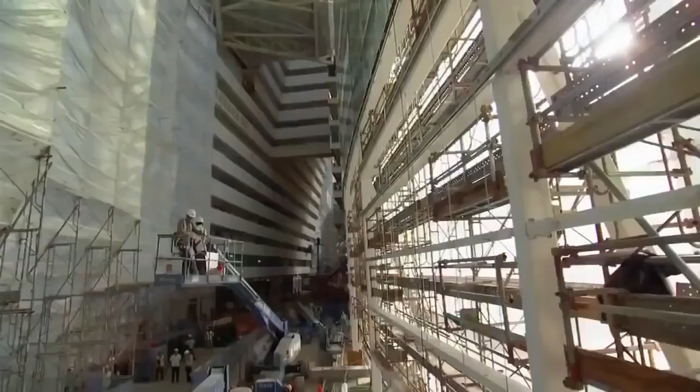Singapore is reinventing itself. This small island nation is attempting to finish one of the most audacious buildings on the planet. It's the country's first casino, 3 skyscrapers, covering 9 million square feet, and topped off by an engineering masterpiece, the first ever SkyPark.

Longer than 3 football fields, with gardens, swimming pools, and restaurants, all higher than the Seattle Space Needle. We're actually in the pool right now. This is the view from the pool. Wow, it's pretty spectacular. That is amazing.

To finish it, crews must perform some of the highest and heaviest lifts ever attempted. You're putting a piece of steelwork the size of an aircraft carrier on top of 3 towers. They'll tackle one of the largest paint jobs on the planet. You would never do this in America. And erect one of the longest cantilevers in the world. 200 feet out over nothing. Oh my God, that's enormous.

I am in Singapore, a tiny island nation with less than 5 million residents. In fact, the entire country is smaller than all of New York City. Located at the southern tip of the Malay Peninsula in Southeast Asia, the main island of Singapore is both a city and a country, one of the most densely populated in the world.

Culturally speaking, it's a somewhat strict and buttoned-up environment. Chewing gum is against the law. Insensitive behavior is punishable by fine. And if you're caught vandalizing a building, you quite literally get hit with a stick.

But despite this conservative cultural backdrop, Singapore is attempting to reinvent its image by doing something totally surprising. They're going to open a massive casino.

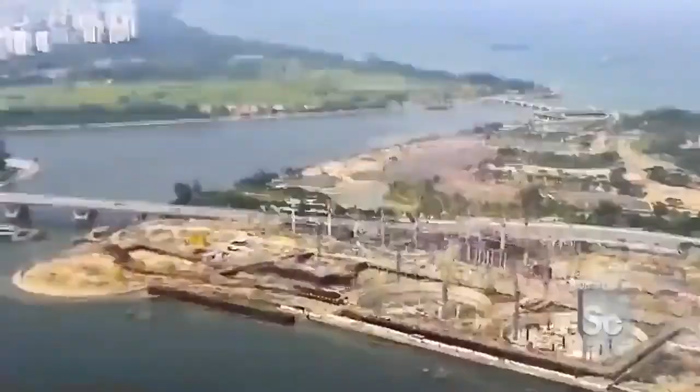With no natural resources of its own, Singapore is risking $5.5 billion in hopes of cashing in on the gambling boom exploding across Asia.

It's a pretty significant gamble because for Singapore, you've never had gaming before at this scale. You've never had a resort at this scale. You're taking a major leap. Yes, it's certainly a transformational project for Singapore, where you hope to not just double, but triple the tourism receipts. That's big.

The centerpiece of this giant transformation: the Marina Bay Sands, one of the biggest and most expensive casino complexes in the world, unlike any hotel and casino ever built.

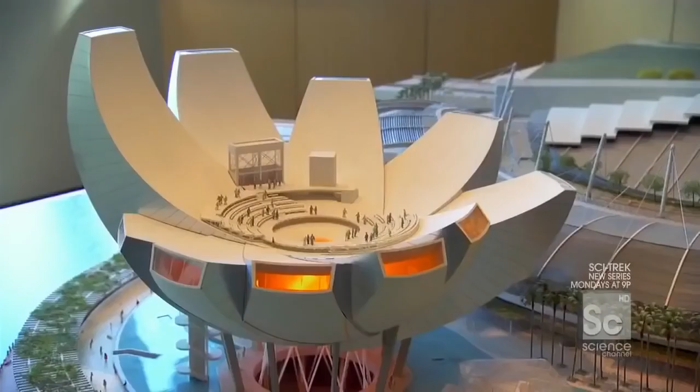Rather than just being a traditional hotel and casino that we might find in Vegas, instead we have a museum, theaters, retail, a casino, a massive convention center, 3 incredible hotels, and all of that capped by the first ever SkyPark. The SkyPark on the very top will become the icon of Singapore, we think.

In a move that has never been done before, world-famous architect Moshe Safdie put a park across the top of 3 massive skyscrapers. An 1,100-foot-long urban oasis with tropical gardens and one of the longest swimming pools on Earth, all of it perched 55 stories above the ground.

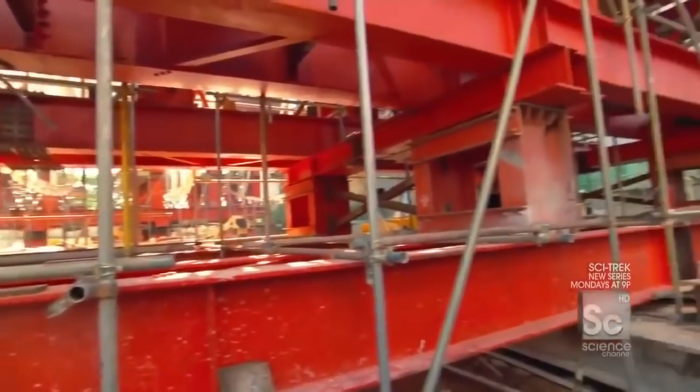So, Brendan, how do you describe a SkyPark to people? It's just a fantastic structure. I've never seen anything like it. There's 3 55-story towers, and you're putting a piece of steelwork the size of an aircraft carrier on top of it. So it's quite a feat.

And there's a park up there. There is. Well, there's more than that. There's observation decks and swimming pools and restaurants and all sorts of things. So it'll be a little city in itself.

The biggest challenge for builders: lifting 7,000 tons of steel, which is more than the main span of the Brooklyn Bridge, on top of 3 650-foot-tall buildings.

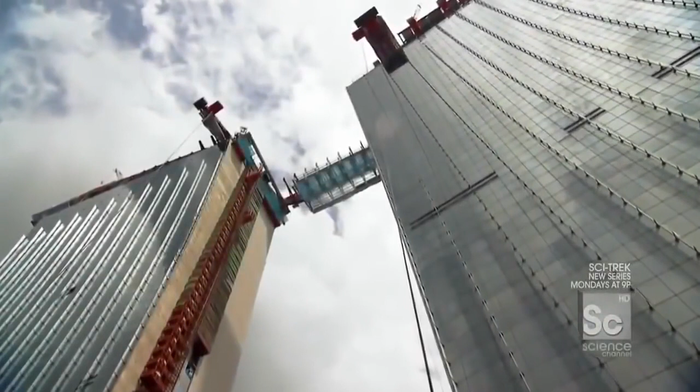To get it up there, the team divided the structure into 14 large but more manageable segments. 6 form the bridges connecting the towers, and the other 8 make up the observation deck, which sticks out 218 feet from the end. Right now, crews are about to lift the second-to-last bridge segment, a massive 350-ton piece that will hang between towers 2 and 3.

It's a little after 7 p.m., and on most job sites, it'd be quitting time, right? Folks would be going home. But here in Singapore, we're about to begin one of the most critical lifts in the entire project.

That bridge segment right there, an over 350-ton chunk of steel, is about to get lifted up over 650 feet in the air.

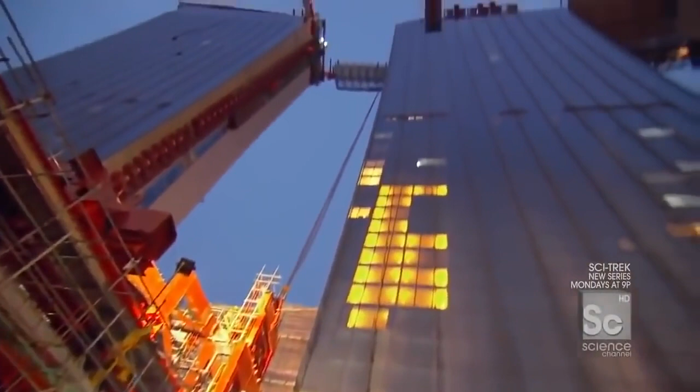I mean, you know, in principle, this sounds crazy, right? Yes, we're actually taking a bridge, lifting it up, and putting it on top of 2 skyscrapers. This has never been done. So you got to be a little bit nervous to get this thing up. Oh, definitely. We have to get it right.

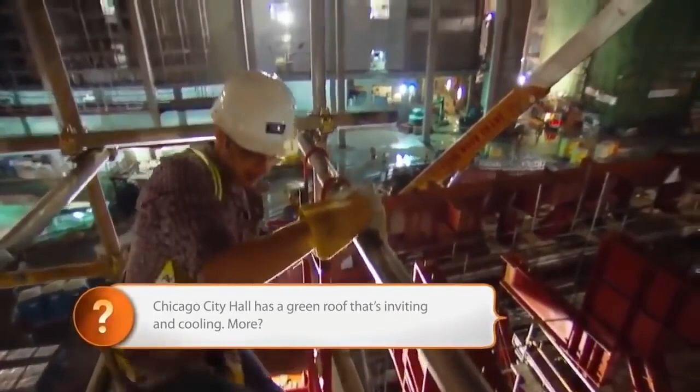Lifting this piece will take some of the strongest hoisting cables ever designed. They get attached to the very top of the segment, 5 stories up. Now, at long last, I'm on top of the whole bridge segment, and you really get a sense of its length, because it spans all the way out between 2 full towers, over 150 feet long.

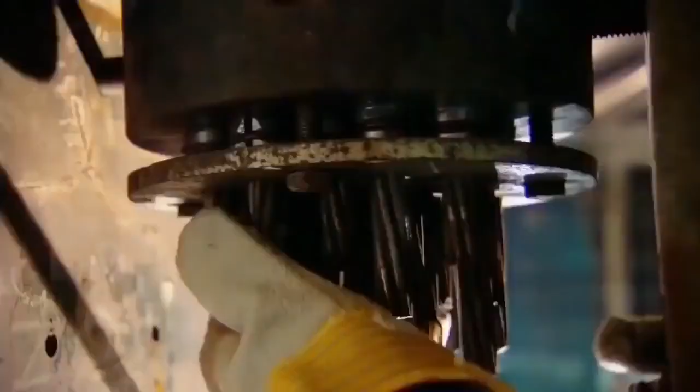And here, this is what it's all about. This is the shackle coming down, over 600 feet up. And to really get that point, look at the amount of bound cables inside of this thing. Just the density. There's 2 of these shackles, one on this side, one on that side. We're gonna lift up over 350 tons of steel.

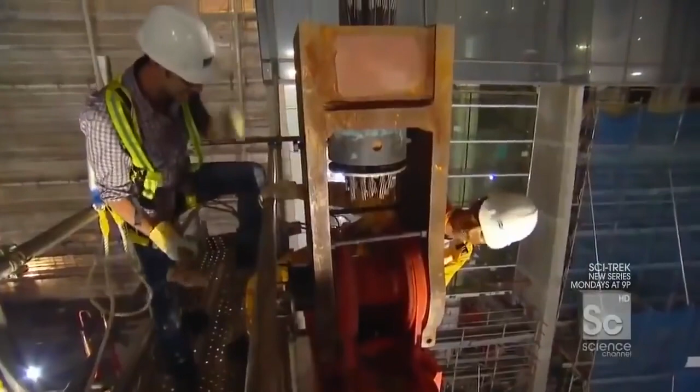All right, you call the man upstairs. An operator from the top of the SkyPark lowers the shackle down. There she comes, there it is, here it is. Okay, 960 millimeters. It has to line up within 1/10 of an inch for this 150-pound anchor pin to fit through. Oh no, stuck. Push, fight, come on, shake it a little bit. Hammer, give it to me. You ready? Here I come.

Once the pins are pounded into place and the shackles are connected, there is one final step to make sure that the load is secure. Overnight, crews test the connections for 12 hours by hanging this segment just 4 inches above the support. If everything looks good, it is ready to go up.

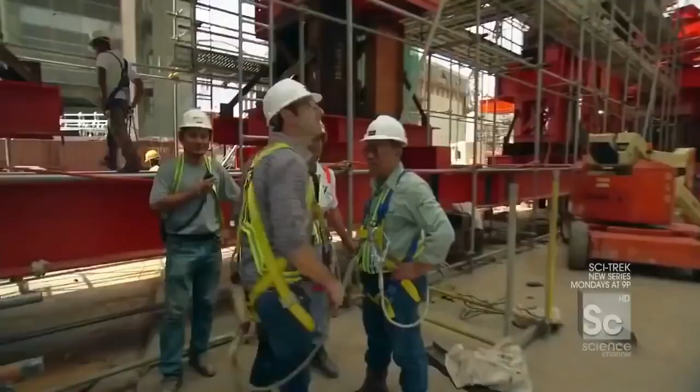Okay, Solomon, she's floating. 4 inches off the ground. Ready for the lift? Yes. How's the wind? If you can see it, it is swinging, and if it swings, it might hit the building. So when the lift begins, the concern is in a strong wind, like a pendulum, it could move and actually hit the building. It's that close to the building? It is very close to the building.

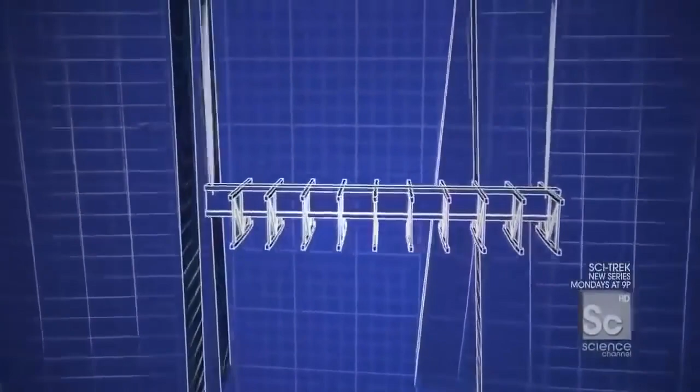Because of the curvature of the towers, this piece must pass within 10 feet of 2 glass skyscrapers on its way up. Any wind over 5 miles per hour is enough to call off the lift. So are we good? Are we ready? Yeah, good. So it's now okay to go.

Typically, crews would use tower cranes for heavy lifts, but this segment far exceeds their capacity. So instead, engineers are borrowing the technology from a different kind of construction: bridge building. Even the most powerful tower crane can lift about 20 tons. This thing weighs over 360 — not an option. So they went with something called a strand jack. To understand how it works, imagine 2 hands or clamps holding a rope. One hand locks the rope, the other brings the rope up, grabs it, goes back for more, and so on.

Strand jacks work on simple hydraulics. A bundle of 22 half-inch diameter cables passes through 2 clamps. The top clamp grips the strands and moves up almost 2 feet. Then the bottom clamp locks the cables in place while the top moves back down for the next pull-up. It takes 2 enormous strand jacks to lift this segment, one on each tower. Combined, they could lift the Statue of Liberty.

It's the first time that this technology has been used to make lifts this heavy from the top of a skyscraper. Tony? Danny. Welcome, Danny. Good to meet you. Tony, where am I standing right now?

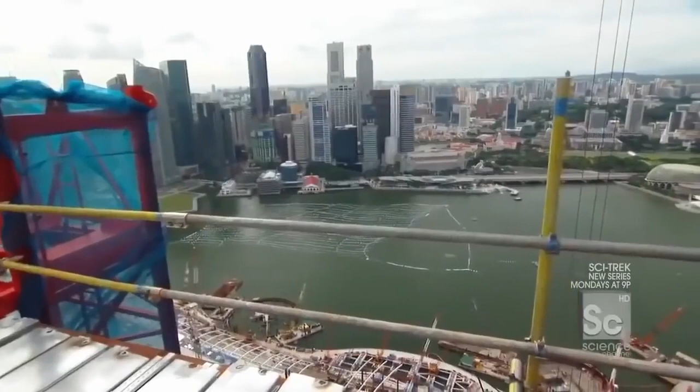Well, you're on the SkyPark. So this is kind of where the action is. This is where the pool is. Right where we are now is the second swimming pool. We're actually in the pool right now. This is the view from the pool. Oh my God, people will be able to swim out to the edge of the pool, and literally there'll be no edge, right? It'll be an infinity edge looking out over Singapore. Wow, it's pretty spectacular. That is amazing.

And what's making all of this happen is this really just nasty looking beam. That's right, so this enormous frame is supporting the strand jacking units. Now, can we actually head up top to the strand jack? Yeah, we can. Let's go this way.

The strand jack sits on a temporary support structure that extends 30 feet out from the side of the tower. So, Tony, where we're walking right now, we're actually leaving the skyscraper below us and now heading out. We've just walked off the edge of the building.

So we're now standing perched out. There's no more skyscraper below us right now. There's no building below us.

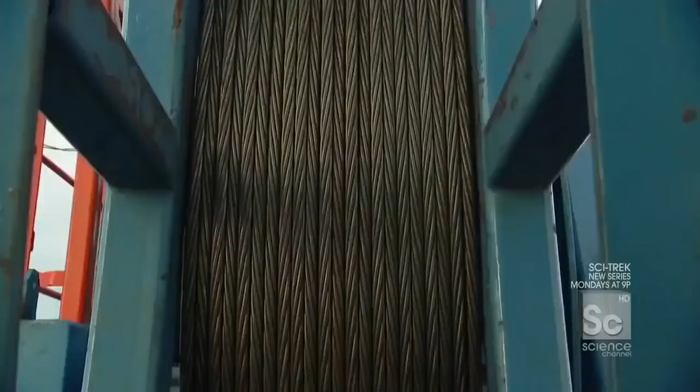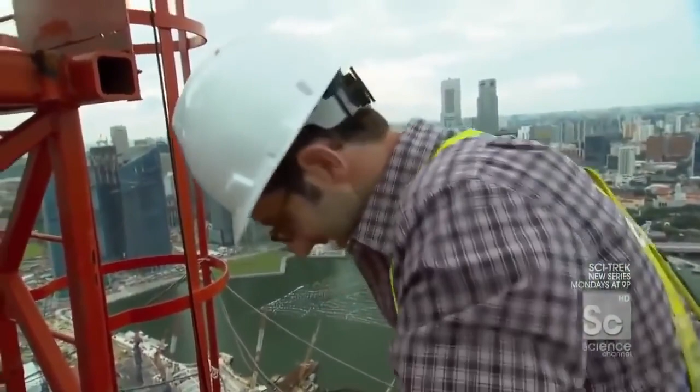It's awkward. It takes almost 30,000 feet of cables to raise the segment, enough to cross the width of Manhattan. And if any of them get tangled, workers cannot lower the piece back down. So one of the most critical jobs on the site falls to the cable manning crew here at the highest point of the SkyPark.

Okay, so I am now standing at the very top of the strand jack. And you know that because right here, this is it. This is the top of the cables. And what we're about to do, every 30 strokes, they stop everything, clamp the lift, and spray some lubricant inside to make sure everything moves real freely.

Unfortunately, I'm getting tasked with that role right now. So what do you got, some WD-40 we're doing this with? Look at this guy. Why is this the most low-tech thing in the world?

Okay, so now what we've done is we've taken the collar off, we've lowered the jack down, now we've exposed the cables to give us good access for some good greasing.

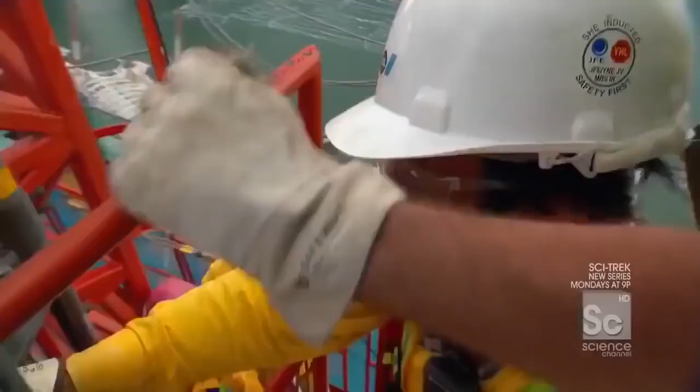Okay, Romley, how do you grease it up? Spray and pull out. Put in, spray, pull out. Go in, spray, pull out. It's sort of humbling to have to climb up to this point, to have that behind you, to have to take a spray can like this, stick in, spray, pull out.

These guys have to grease these cables once every hour for the entire night to get this segment up the final 500 feet to the very top of the SkyPark.

Coming up, a one-of-a-kind solution to fight Singapore's intense sun puts up a fight of its own.

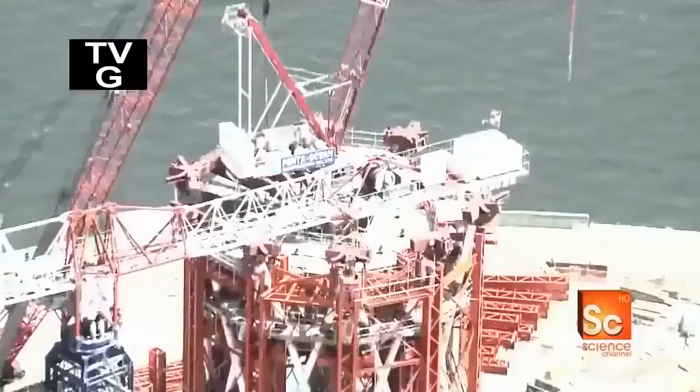Singapore is just 14 miles long. And with literally nowhere else to expand, this tiny island is increasing its footprint by actually filling in the sea, creating almost 1,000 acres of land on which to build an entirely new downtown.

So tell me something, if I was standing here 5 years ago, what would I have seen there? Well, 5 years ago, you wouldn't see the floating gallery, you wouldn't see the wheel, you wouldn't see Marina Bay Sands, neither would you see the financial center. So this is a radically different skyline in just 5 years' time. Yes. Singapore's evolution involved 30 years of land reclamation, followed by 5 years of construction, all culminating with the Marina Bay Sands. So 5 years ago, this would have been called the old downtown of Singapore. Yeah. And now with the Marina Bay Sands completed, this becomes the new downtown. Yes, absolutely.

The Marina Bay Sands' 3 hotel towers will offer guests phenomenal views of Singapore's new downtown. But they also had to be a stunning centerpiece for the city's redevelopment. So, to define their curved silhouette, the architect clad the tower facades with 1,900 glass fins, which also perform a key functional role for the building.

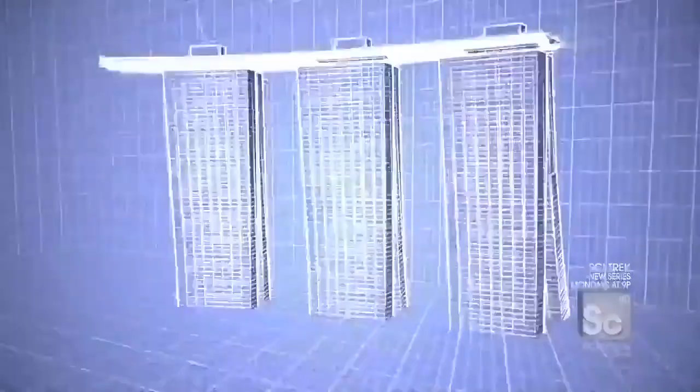The western face of the towers gets the most intense afternoon sun, so when the light hits the fins, they actually deflect the sun's rays, casting a shadow that reduces the heat on the hotel rooms by 20%, while still enabling clear views of the bay. But this distinctive design feature is also one of the most difficult to install.

I think today is going to be one of those days where I go and do something that I kind of think I shouldn't do, but in the name of really understanding how it is they build this building, we're going to do it anyway. I'm going to take you in a gondola up the side of a building, almost 600 feet, to install glass fins. And the guys who are going to help me do it are right here.

Terry? Hi, Danny, good to see you. David, how are you? Danny, good. Not bad. What are we up to, fellas? We're actually going up to the top.

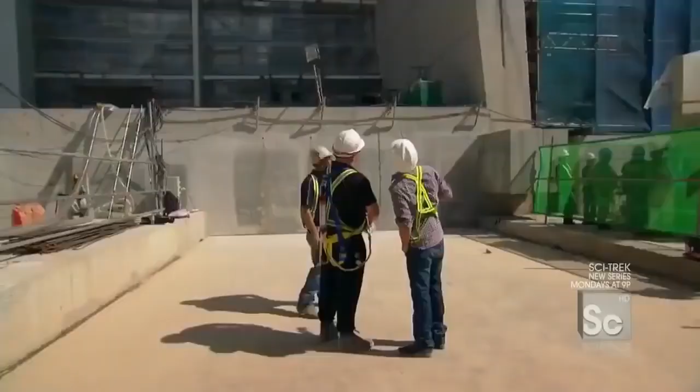Basically, we're going to install the last fins to Tower 1. And these fins are actually hanging perpendicular from the facade of the building. Each fin is 10 feet tall and weighs 400 pounds. They're hung in straight vertical lines, protruding up to 4 feet from the side of the tower. Because the facade actually curves outward 5 degrees at the top, there would not be enough clearance for the SkyPark lift to pass by. So 12 fins in the upper corners of each tower were left off until now.

So this is it, we are closing up the curtain wall of Tower 1. Yes, big milestone. Big milestone. All right, take me over to my maker. Let's do this. Okay, no problem. Lead the way.

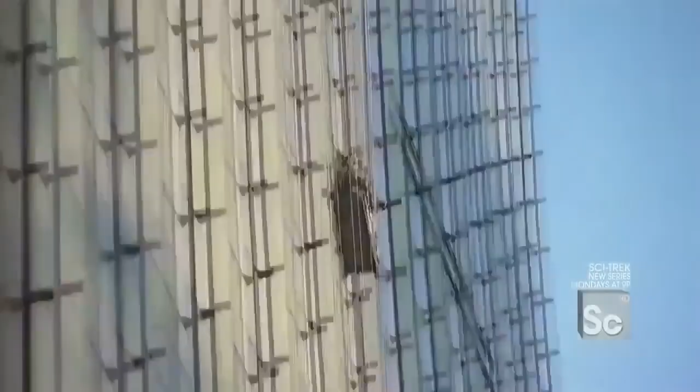Terry's crew installed the fins from a 6-foot-long gondola hanging off the side of the building. You gotta be kidding me. It's basically the size of a bathtub, swinging from 2 sets of 650-foot-long cables tied to the tower.

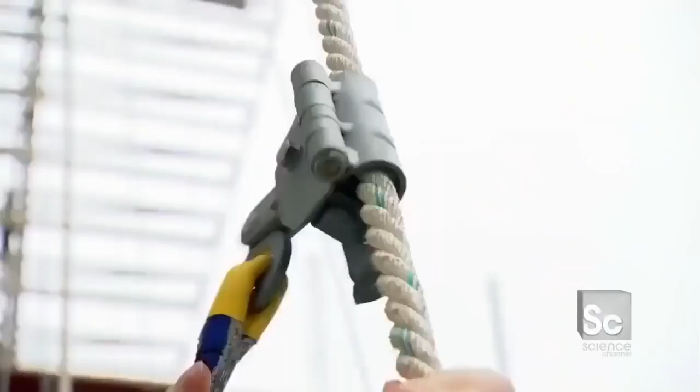Just gonna hang some glass for my boy Jay. 600 feet in the air. Right, man? Give me some skin. Buddy, we're gonna be great.

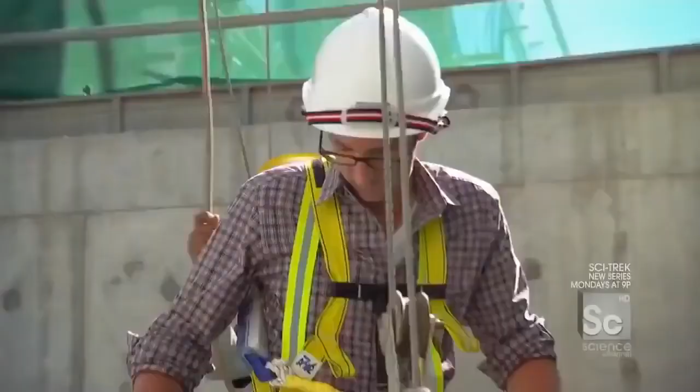Yeah, here we go. The gondola travels at just 0.2 miles per hour. Here I come, moving along, just moving along. So it'll take me more than half an hour to reach the top. Oh my God, this gondola looks like it was built by the Unabomber.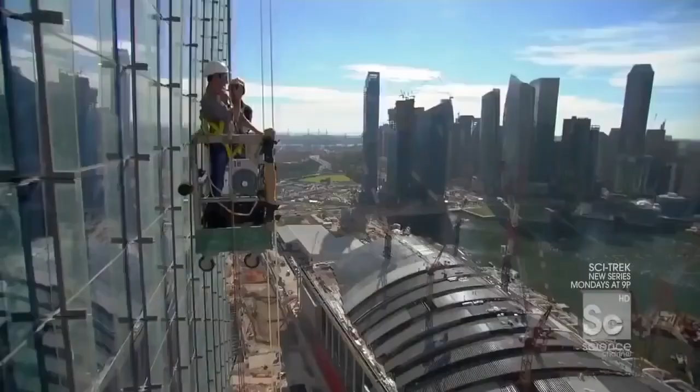Sometimes I don't really feel like I give you exactly what's going on for me right now, so I want to give you just a little taste of what I'm seeing. There is a fantastic view of Singapore. There is Jay, my chatty friend. And there is not a good situation.

All right, we're almost near the top, and you can tell because the building is beginning to bend back on itself and get closer to me. Right there, check it out - we're about 80 feet from the top of the building, and if you look up, you can actually see the missing glass panel.

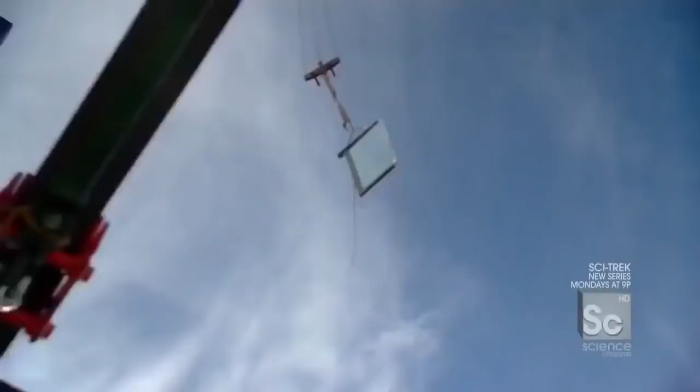And as I approach the top of the skyscraper, they're prepping the glass. There she is. Oh, the wind is really moving up here. That looks safe. Hey fellas! How are you? Okay, nice weather, huh? This is something you don't see every day.

I'm outside a skyscraper, and right here, right now, I am touching the top of the building. We are on top of the skyscraper. All right, who's ready to install some fins?

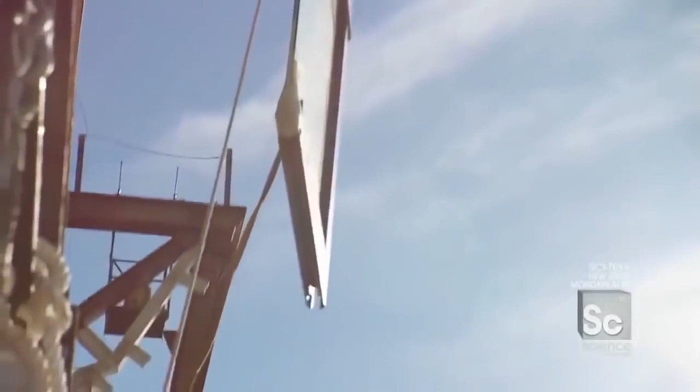Each fin is a custom-built pane of solid glass. I got the line, hang on. On a calm day, they are extremely difficult to manage. The wind is blowing this thing out. But on a day with even a light wind, the task is almost impossible.

Give me a hand, give me a hand. Hang on, these gusts are gonna pull you right outside the basket. Hang on, give me some help. But I'm not kidding, every time you get like a little gust of wind, I can feel my feet getting pulled a little bit. There she is, slowing down. It's basically like a big double laminated glass sail, and if the wind catches it, it moves.

Okay, let it come down a little bit more. The fin can swing up to 20 feet while attached to the tower crane. Coming this way, okay, watch out. Someone help him, someone help him. That's just too dangerous for the final installation, so the team has to transfer it to a more precise chain block mid-air.

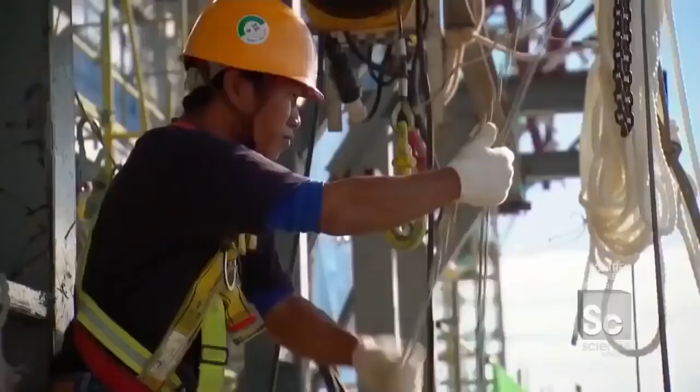Whoa, hold that side please. All right, so this is it. What we're doing right now is essentially taking the load from the crane and transferring it to that chain block. Are we in? Okay, I think we're set.

This is another one of these moments in my life where I say to myself as an architect, did you really need the fins? Did you have to have fins? Building would have been fine, you know? Okay, gondola down. The fins are designed to clip into each other at the bottom.

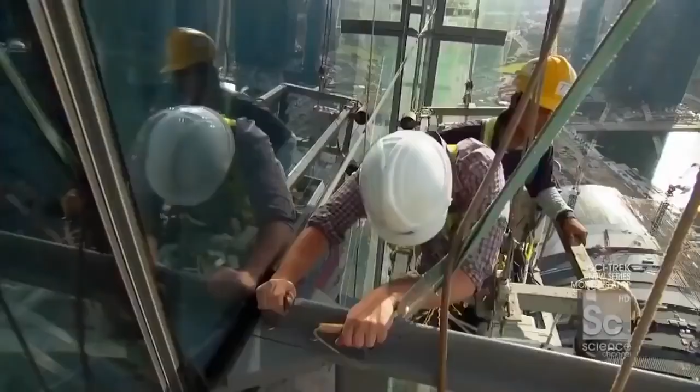Lean down now, Jay. But here, at the very top connection on the highest fin - oh boy, this is gonna be a nasty one - it gets locked to the building with bolts. Okay Jay, 4 bolts. Give me your thoughts. 1, 2, 3, 4. Are we good? Okay, are we good?

Come here, bring it in. I need some, come on. Give it to me, babe, I need some. There it is, okay, that's right. 4 bolts, locked in, lined up. We, Jay, are done. Can we go home?

Home - that much he understands. Let's get out of here.

Up next, building one of the longest and highest cantilevers in the world, jutting out more than 200 feet over nothing. Oh my God, that's enormous.

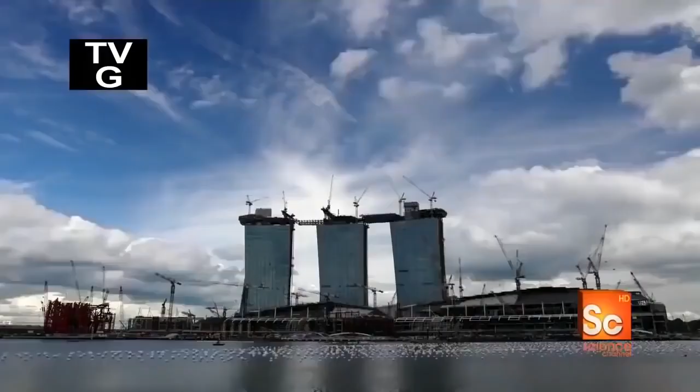Singapore's new SkyPark is the first of its kind: a steel structure longer than an aircraft carrier, on top of 3 skyscrapers taller than the Seattle Space Needle. On the northern end, the architect took this innovation one step further, creating the longest cantilevered observation deck in the world. It's the biggest and heaviest section of the SkyPark, and it hangs out 200 feet over thin air.

When it's done, the SkyPark will look to the eye like one 1,100-foot-long continuous element. But the reality is, it's made up of two very different structural conditions: bridges on one hand, and something called a cantilever on the other. Spanning between towers 1 and 2, and towers 2 and 3, are two bridges, basically acting like tabletops. The force goes from the bridge, transfers into the towers, and down shear walls into the foundation.

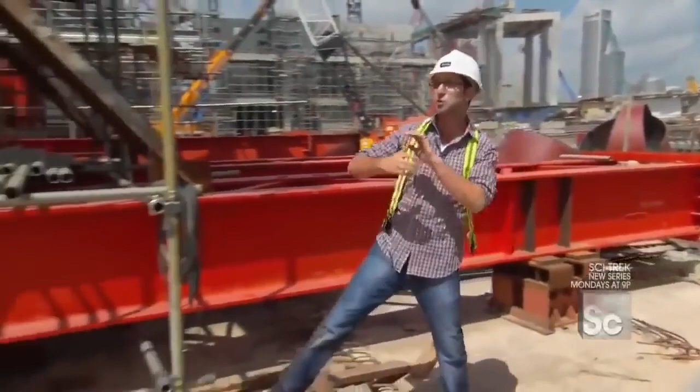The cantilever is a different story. A cantilever, by definition, is a load supported on only one side. So what you have here is a 218-foot-long span, almost like a diving board, perched out over nothing. Intuitively, that load wants to just twist off the building. So to keep it down, they've put not one, but two 700-ton backspans holding down the cantilever. The two backspans weigh as much as a fully loaded freight train, but that weight is critical to balancing out the cantilever, which will jut out longer than a 747 from the end of Tower 3. There are 860 tons of structural steel that make up the 218-foot-long enormous cantilever.

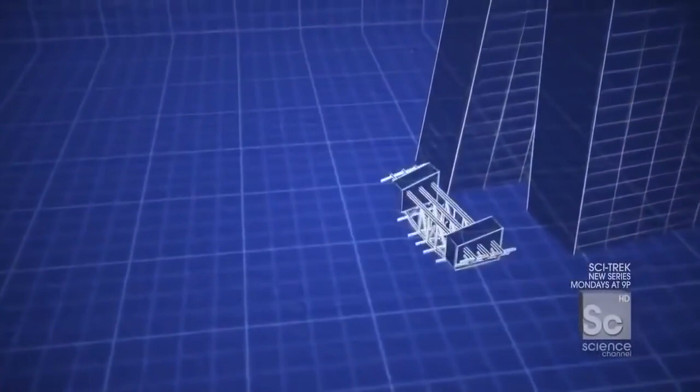It is so big that they actually assemble the entire unit here on the ground before sending it all the way up there. The cantilever is too big to be raised in one single lift. Instead, it's divided into 6 segments. Once they're 650 feet in the air, crews will have just one shot to fit them together. So before the segments can be lifted, they're assembled on the ground to be sure that each connection will fit perfectly.

So these pieces behind me represent the very final pieces of the cantilever to be assembled here on the ground. Once we get this and this bolted onto that massive cantilever, the lifts can begin.

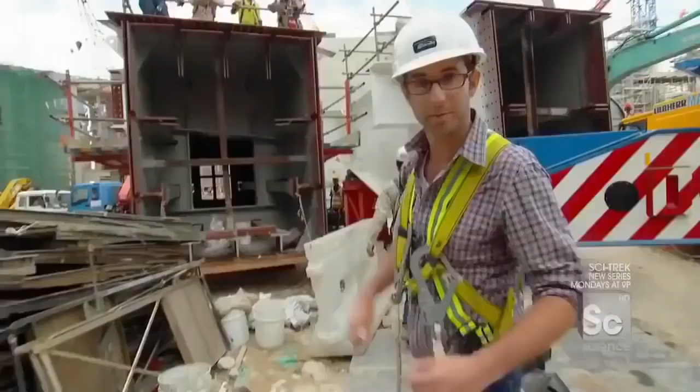So the crane's now setting the shackles up. We're going to go on top of the piece to connect it. The piece we're attaching today is 12 feet tall and it weighs 30 tons, as much as 2 Mack trucks.

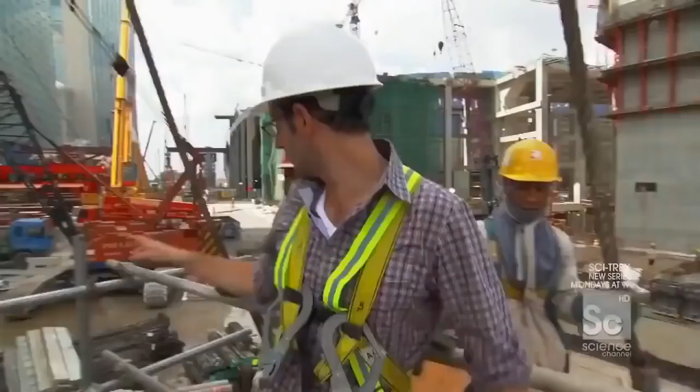The crane will lift it over to the rest of the cantilever using 4 extra-large shackles. Shackle number 1, 2, 3, and 4 are all connected. The next step is to take the piece that I'm standing on, lift it up, and extend that cantilever another 50 feet.

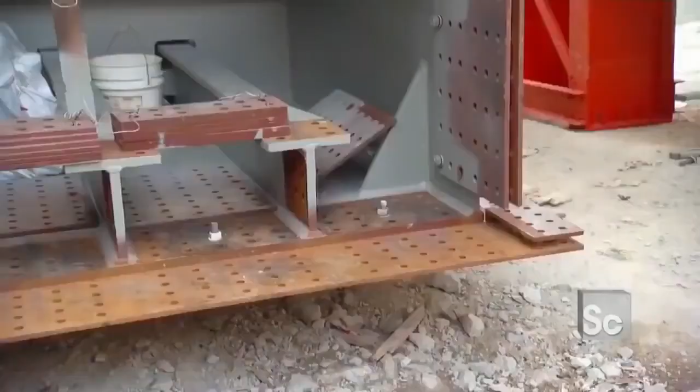So what they've done is they've put a bit of tension in the line, lift the piece just off the ground to make sure the shackles look nice, and they know where the center of gravity is. Are we good? Are we ready? Yeah, all right, let's go. She's off, out of our hands. Now the crane's got her. He's gonna swing her all the way around this way.

What's really worth noting is as you look at this thing, this massive floating piece of steel, it's not but a small fraction of the entire cantilever that's going up there.

Even with 1.5 million pounds of steel, this cantilever will still be susceptible to the problem facing all structures: movement. All buildings, all bridges, even all cantilevers have a natural frequency, meaning they move ever so slightly. Now, if the movement of wind, or the movement of people, starts to align with that building's movement, it can combine and collaborate and literally shake a building. So when the engineers were designing the cantilever, they had to be concerned with not just how many people stood on the edge, but also how they were moving.

This cantilever has been designed to withstand wind and earthquakes, but its most dangerous threat could come at the hands of a DJ. It's thousands of tons of structure up there, so you and me jumping about, it's not going to do very much.

But if you get 100 or 200 people all jumping up and down at the same frequency, it can actually excite the cantilever and you start to feel it. It would take hundreds of people dancing to the exact same motion. Like the Macarena. Yes, that's right.

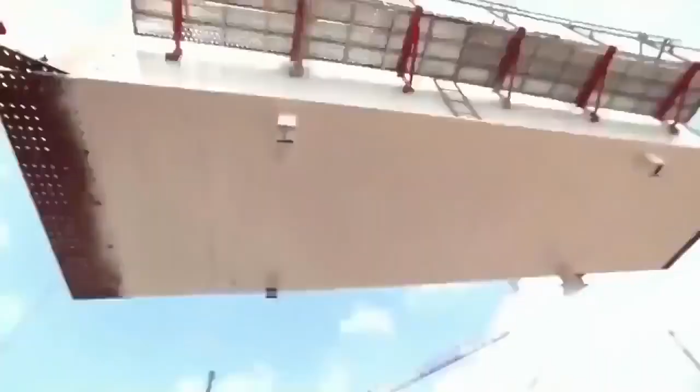Now that the piece has made its way over to the rest of the cantilever, the next major challenge is lining this giant segment up for attachment. The piece is now literally sitting right on top of my head. Just imagine, on top of this incredible long piece of steel will soon be a garden, a pool, and a dance party.

Something incredible about lifts like these is that the first 99% happens almost instantly, and now it gets down to the details. Pushing it, pulling it a matter of inches, to get all these holes lined up, to get the bolts in, and take the load off the crane.

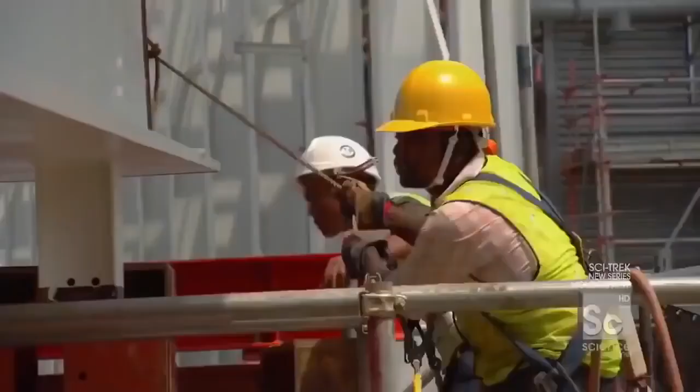Once the piece is in place, the crews have to line up all 1,500 bolt holes. There are so many bolt holes. They'll connect about a third of them here on the ground to make sure everything fits together before liftoff, because there are no second chances once this piece is airborne. This is how one fits into the next piece right here. You have these two plates on top, and they're sliding over the top of the previous cantilever piece.

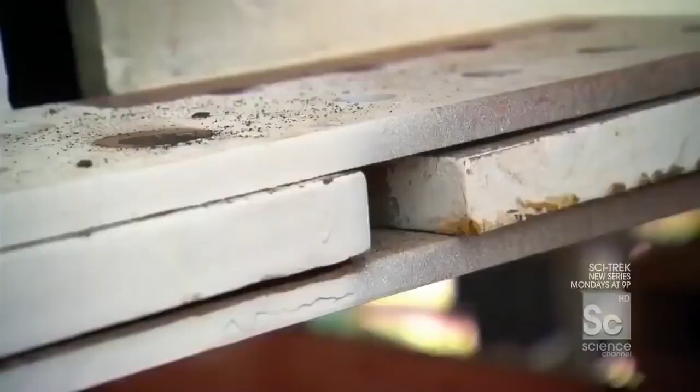Here it is, it's coming in, it's coming in. Once it's there, we'll put this pin in to lock the piece together so we can release the crane and move on. About 2 inches. Just about there, just about there. Okay, yeah, use the hammer.

The pin secures this new piece to the rest of the cantilever, so bolting can begin.

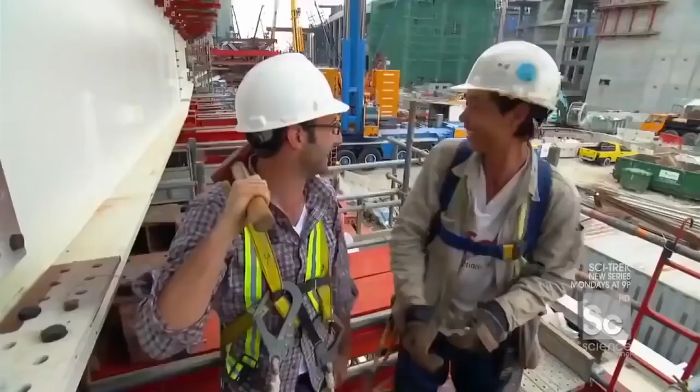Man, I never do that. Usually I break a finger, knock some steel off the thing, and almost break the hammer most of the time. I knocked the crap out of that thing.

As you can see, the piece is in its final location. Now from where I'm standing, I think you can really get what this thing is: an 860-ton, 218-foot-long steel diving board that's going to be perched out over 600 feet in the air.

Coming up, a hotel like no other, with a lobby bigger than a cruise ship, wrapped in glass. This is probably one of the most spectacular corridors I've ever seen.

But first, what is the maximum number of people the SkyPark can safely hold at one time? The answer after the break.

The answer to the trivia question: 3,900 people can safely be on top of the SkyPark, but only 900 of them can be on the cantilever.

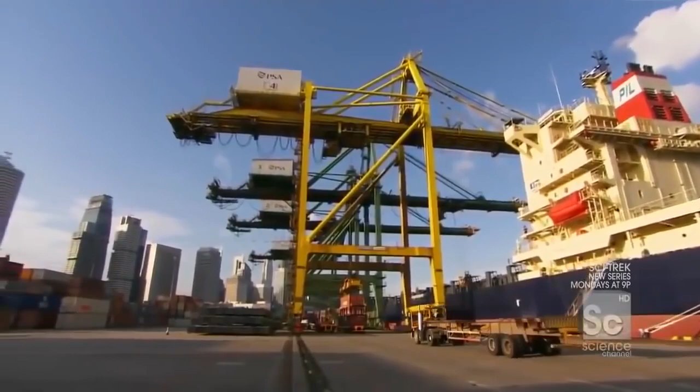Singapore is the gateway to Southeast Asia, and for the past century its economy has depended on its location as one of the world's busiest shipping ports. But this city is in the midst of a makeover. When the Marina Bay Sands opens later this year, Singapore will instantly become one of the largest gaming markets in the world, putting it in the same league as Las Vegas, Atlantic City, and Macau.

When Macau opened their casinos, they looked to the past for inspiration. You have the Venetian in Las Vegas, you have the Venetian in Macau, a carbon copy, only bigger. But here in Singapore, a country so focused on image, they didn't want to mimic what came before them. Instead, they're trying to literally reinvent the idea of a hotel casino.

The difference comes down to design. The typical casino model involves a giant gaming floor with a flashy attraction out front and a hotel connected in the back. But with the Marina Bay Sands, the architect separated the hotel from the casino and relocated the attraction on top in the form of a SkyPark.

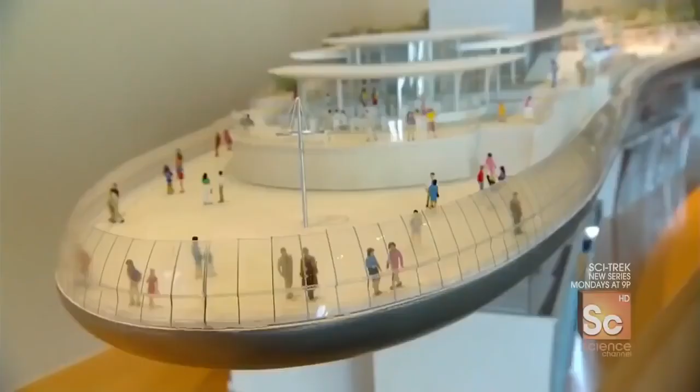From my perspective, when I think of a hotel and casino, I think of a ginormous casino, a tall hotel in the back, and basically not being able to check in and go to my room without passing a blackjack table or slot machine. This doesn't follow that model. Singapore has a very particular vision as to how they want the gaming component to work. What we built here was not something casino focused, it was all of this. So the casino is part of something far grander. Key to making that happen is not just building a set of normal, typical expected structures, but instead to do something like that.

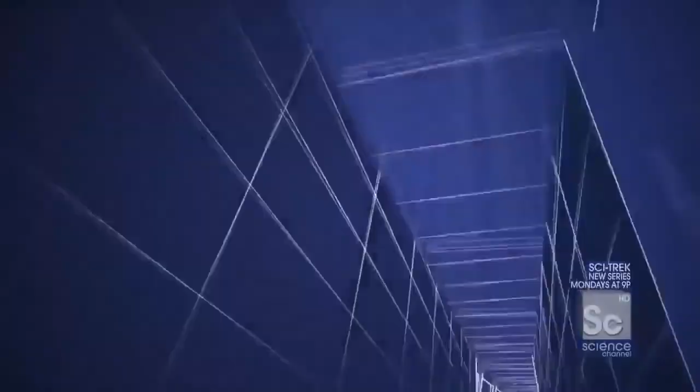This revolutionary design carries over to the hotel towers themselves. To create a hotel lobby like nothing before, the architect split each building apart for the bottom floors, creating one long tapered space linking the three separate towers together. The 3 hotel towers are all connected by one long continuous atrium, and that atrium is covered in glass.

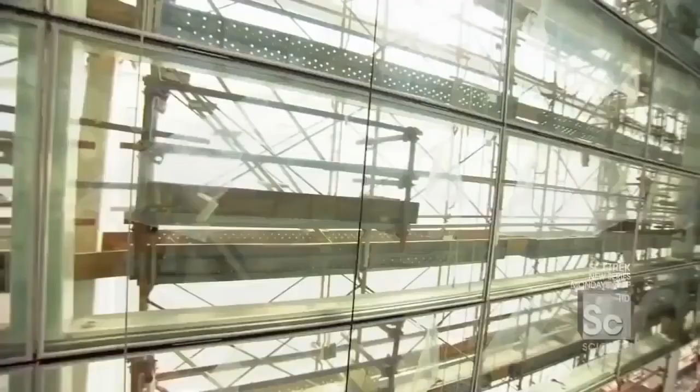These massive 9-foot-long panels that we're about to take from down here and install right up there. 3,500 individual panels will hang throughout the atrium, transforming this space into one 850-foot-long tube of daylight.

So Terry, once the scaffolding comes down behind that glass, this whole chamber is going to be just awash in light. Yes, that's correct. And these spaces literally link all 3 hotel towers and let you look from one end of the building all the way down to the far end. So this is more than just a kind of connective hallway from one hotel to the next. It's not just a corridor. No, and if it is, it's probably one of the most spectacular corridors I've ever seen.

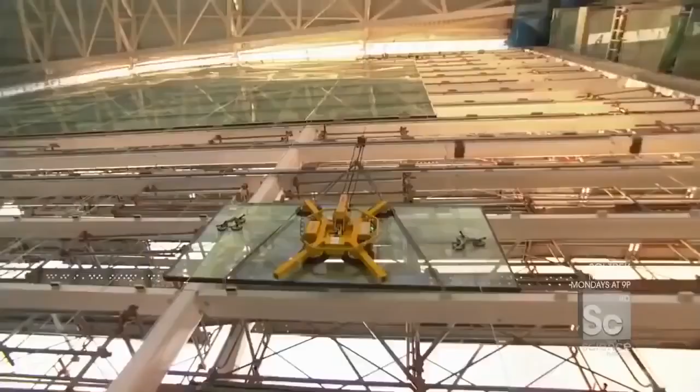Correct. The atrium glass is a key part of the tower design, but it also plays an important functional role in sealing up the building. With hotel guests arriving in just 6 months, the delicate job of hanging all that glass needs to happen quickly. Why is it so important to get the glass on the atrium and button up the facade? The vital bit is we have to make the building watertight as quickly as possible to enable all the final finishes to commence on the inside. So all the sheetrocking, carpeting, wallpaper, painting, that sort of stuff can't happen if moisture can still penetrate the building.

That's correct, yes. So today we're going to be headed up there. We're going up to the top and we'll be installing the top piece of the glass. So we have a big task ahead of us, either way. To finish the atrium on schedule, Terry's team has to install 200 panels a day, about 5 every half hour. So here the guys are, they're just getting the glass ready.

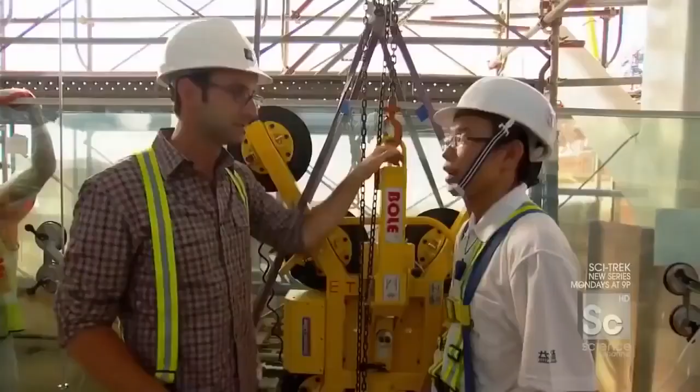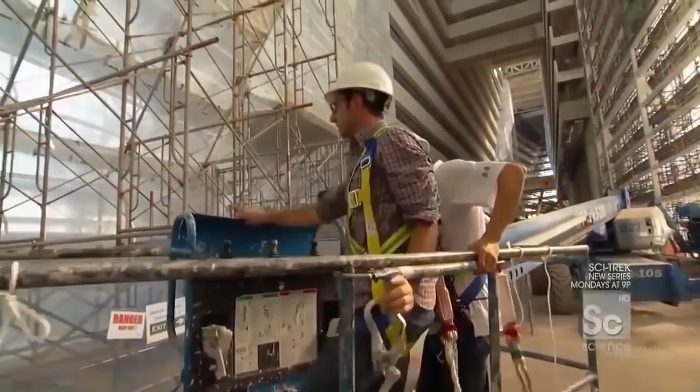Let's do it. We're installing the 3rd highest panel in this section of the atrium, more than 100 feet from the ground. Safety harness? I want you to be safe the whole time. In addition to Why and me, it'll take 10 other workers to install this 550-pound panel. The crew on the ground applies suction cups to the glass and then sends it up on an electric hoist to meet the crew in the air.

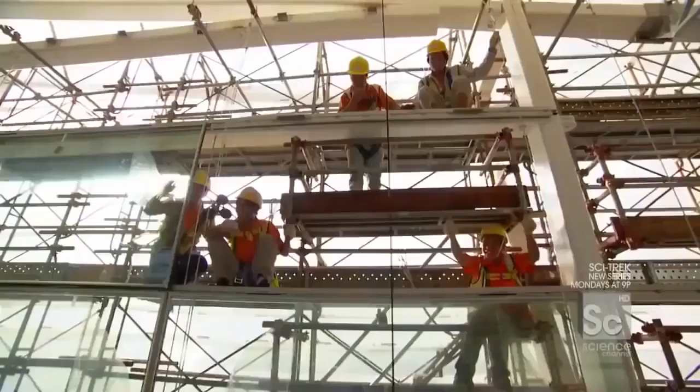Here it comes, check it out, and waiting for me. Hello, my brothers! You guys ready to rock and roll with myself and Why? Ready? The big team, this is it. This is the Singapore Glass Stallions. All right, here it comes. It's a big piece of glass, huh? Why, yes. What are we doing, what's the first step? The first step is we need to take off the handle. So I'll take off that side, you take off that side? Yeah, take off only the handle. Turn only. Yeah, yes. All right, I don't want to drop it though.

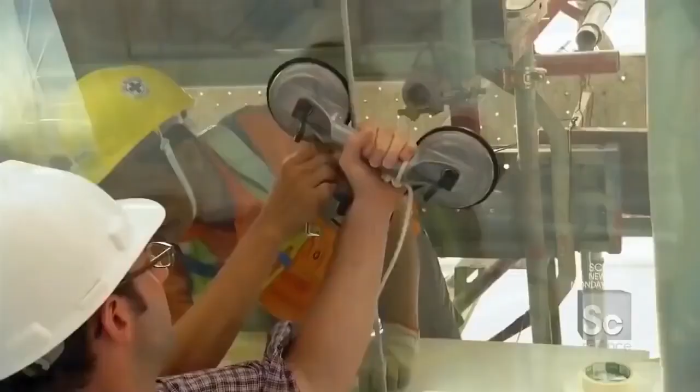Don't want to drop it. The panel is supported by a backup system of smaller suction cups to help guide the piece on its way. Let go? No, it's too scary, I'm not going to do it.

And just like the glass fins outside of the towers, we'll finish maneuvering this panel into place with the chain block. So the chain block has lifted the glass panel to just about the height of the previous panel. The next step is to push it in and get it locked into place on the brackets.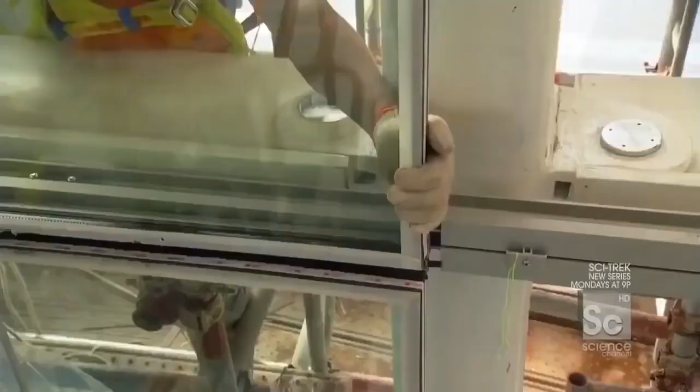The interior work for the hotel cannot get started until all the atrium glass is hung and the lobby is watertight. So to speed up that process, 20 attachment brackets come pre-installed on the atrium wall frame. They sit horizontally so the glass can slide into place.

Then we'll turn them vertically to lock the panel to the building. You make sure all the pressure bars are tight, because hand power is not standard.

You haven't seen my hand power. Tight, check it. If you don't trust me, check it. Have a look, that's good stuff.

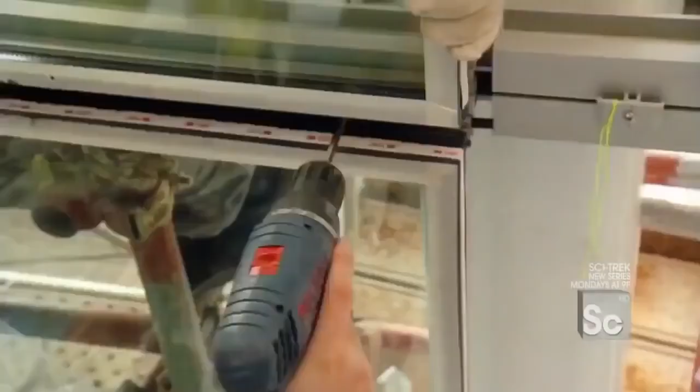All right, so all 4 sides are locked into place, and this glass panel is now fully supported by the building. So I'm pulling the plug. Suction is coming off. 3, 2, 1. All right, very nice. Look at that.

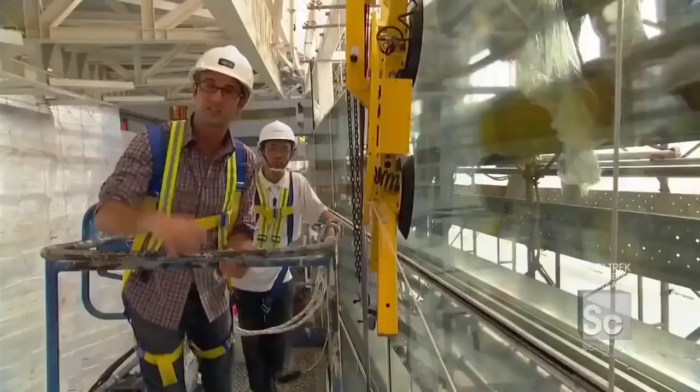Okay, it's you and me. Go home. Now go home. And by go home, I mean hang glass the rest of the day.

Up next, racing to finish one of the largest paint jobs in the world. We're gonna use a brush. Yeah, this brush.

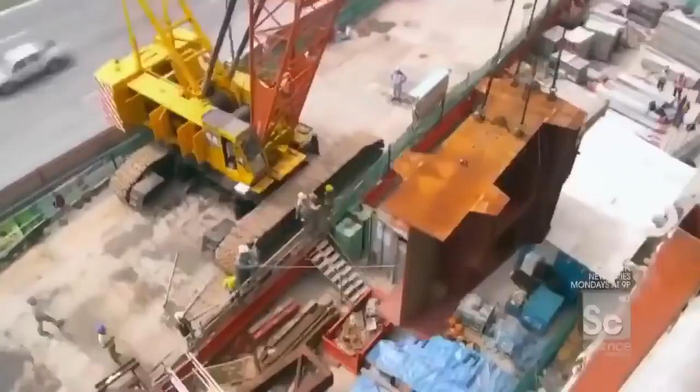After 30 years, Singapore's ambitious downtown redevelopment is nearly complete. Its crown jewel, the $5.5 billion Marina Bay Sands, is due to open in just 6 months, and crews are racing to complete the hotel's complex facade. The glass on the face of the towers is complete, but on the side walls, the concrete remains exposed. So to finish those walls on time, there's another massive job ahead.

When you clad the outside of a skyscraper, typically you cover it in maybe some stone veneer, maybe some glass, or maybe some metal paneling. What you don't do is paint it, because if you've ever painted a fence, every couple of years you have to repaint it. But here in Singapore, they're so focused on things being clean and immaculately maintained, they're willing to actually paint their buildings. So today, I'm going to do something you would never see on an American construction site. I'm going to paint a skyscraper.

Crews will have to paint an area about the size of Mount Rushmore. Muti, I'm Danny. This is going to be one of the single largest paint jobs ever attempted.

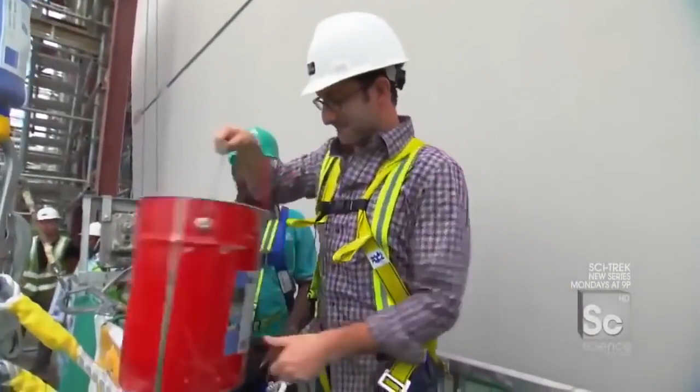I got a bucket of paint, and in order to apply the sophisticated skim coat with the technology, we're going to use a paintbrush. Really, Muti? Yeah, this brush, a small brush. And obviously you couldn't do a skyscraper with that little brush, that'd be crazy. So instead, I have a roller, which ought to really expedite the process. Painting fast. All right, well, what more do you need? Away we go.

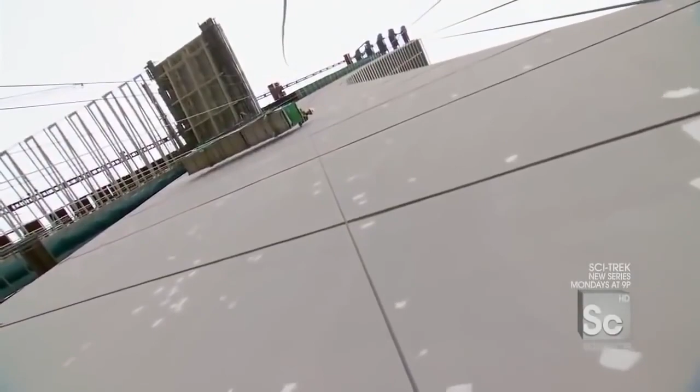This wall faces the country's main highway, connecting the airport to downtown. So Muti, you're okay? Heights, no problem? No problem, no problem. And on opening day, with all eyes on Singapore, it's gotta look good.

Welcome to House Painting 101, Skyscraper Edition. We're about 200 or so feet in the air. We've reached our cruising altitude in a super robust and technologically sophisticated gondola system. And what we have to do is fix this, because this wall is a mess, with little holes they patched and filled. We have to have one smooth surface ready to be seen by all of Singapore.

Start with the dark gray first. I'm gonna paint within the lines here. The dark gray lines mark each floor of the tower, so you can still see the floor-to-floor separation from afar, giving a sense of scale to this massive surface.

Now that the gray line has been deepened and darkened, we're gonna start painting the building. Go to it, huh? All right, nice and gray. I like that. Muti's looking over like I'm touching up the top of the Sistine Chapel or something. Muti, how's it look, does it look good? Yeah, very nice, very nice. Good, very nice.

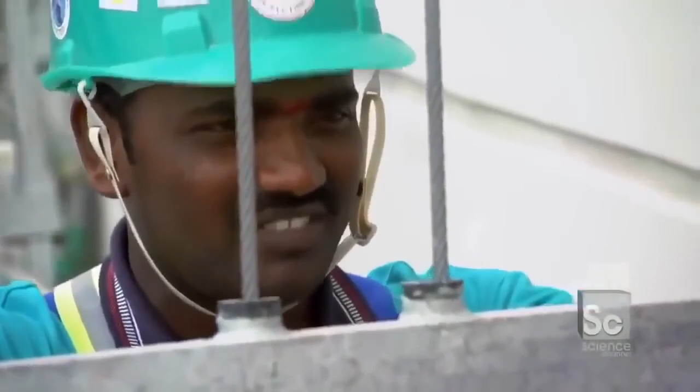Moody's loving it. In total, Moody and the rest of the crew will use more than 2,200 gallons of paint to cover all the tower shear walls in time for opening day. And this project cannot afford delays, because every month the casino is not open, developers give up $100 million in lost revenue. So these crews have been running at top speed since day one.

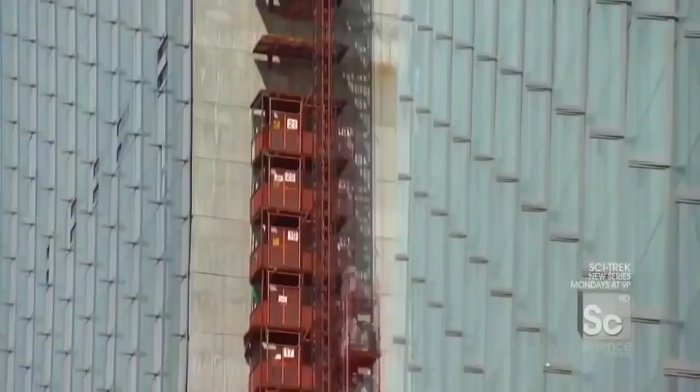John, just to put this in perspective for someone who's not used to seeing a project this size, it would take perhaps another country, a project this big, this expensive, this complex, as much as 6+ years to build. And you guys are on target to complete this in 3 years, half the time. And one of the critical aspects of this project at the moment is getting that SkyPark structure up. Getting the superstructure of that SkyPark done is key to closing up this project and finishing this race. But this is going to be a sprint to the finish, because crews up at the top of the SkyPark have only 6 months left to turn this mess of steel into the world's longest elevated pool deck.

This is it. This will be the pool deck, and that will be the pool. But there's a problem, a pretty big problem. You go on vacation, you come to the SkyPark, you see this amazing view of Singapore, and then you fall through a hole to your death. Not good. Not good fun on the vacation.

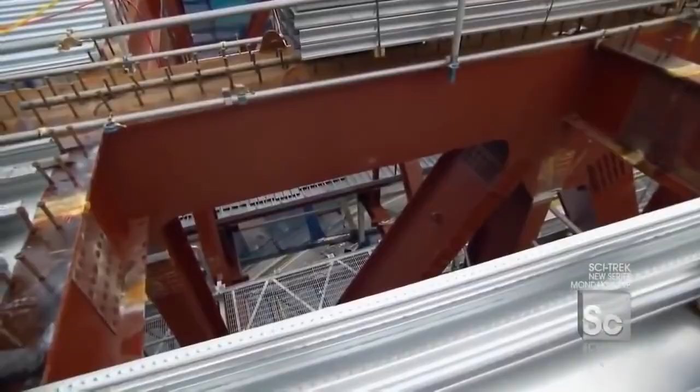So Wilson and I are going to cover it with this aluminum decking. Let's cover the holes, my friend. We're filling in the bridge segments between towers 1 and 2, more than 650 feet up, and there is literally nothing below us but the decking we're about to lay. I just looked down and I saw a car and it was so little, and my body was like, wait a minute, what are you doing up there?

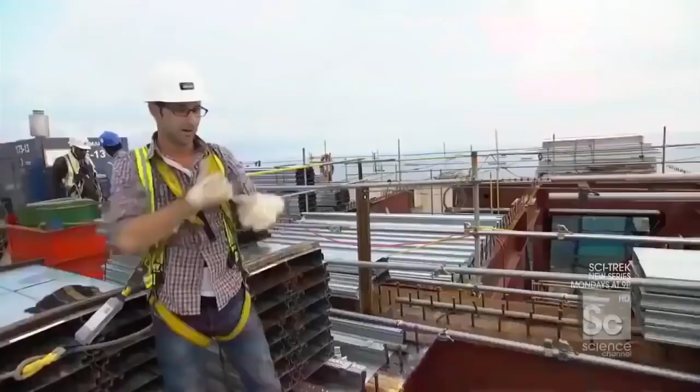All right, Wilson, how do we begin? Step 1. Okay, you ready? 1, 2, 3. Slot in. Pull back, pull back, okay good. Put the clip on. Nice, Wilson, next piece, plugging up the hole. Dear God. Okay, letting go.

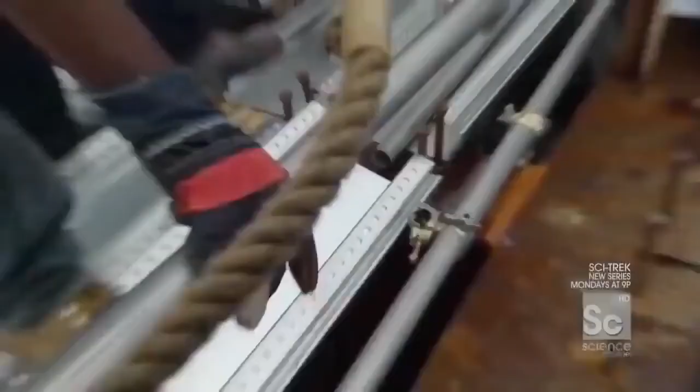With these 10 panels in place, another 125 square foot section of this SkyPark deck is complete. Last piece, victory! Wilson and the rest of the crew will have to lay down 300 panels a day in order to have the entire SkyPark ready for opening day.

Wilson, when the SkyPark is done, people will be swimming right there, correct? Dancing on that cantilever. Having dinner in that restaurant. Yes. But we're not done yet, are we? Come back in 6 months, check out this SkyPark. Me and Wilson will be having a cocktail and enjoying this ridiculous, incredible view. You're buying though, right? Yeah, correct. All right, cool, Wilson's buying, so it's all good.

When the SkyPark is complete and the Marina Bay Sands opens, Singapore will join the ranks of the world's top gaming destinations and fulfill a 3-decade-long quest to reinvent a nation.

For me, the moment when a building actually becomes a piece of architecture is when it transcends its function. Think of the Empire State Building, it's not just about the people who work inside of it, but it's really about the spirit of New York City. The Marina Bay Sands is a project with a hotel and a convention center and a casino, but in reality the sum is greater than the individual parts. This is a project where an architect, an engineer, an owner, and a government have all come together to literally try and reinvent the face of a nation. And I think if you come back here in about a year's time...